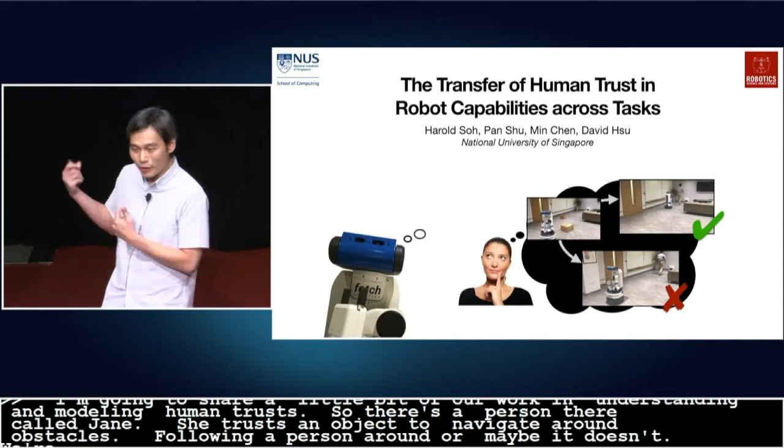We're interested in this question because trust affects how we interact with robots. It would be nice if robots can also infer how we trust so that they can guide our interactions appropriately. We would like to avoid situations of under and over trust, which can have dangerous outcomes. For example, in 1923, the US Navy lost 7 ships because the captain undertrusted her automated navigation system. Fast forward to 2018, and we have people overtrusting their self-driving cars, right?

So to understand this a little bit better in a world where robots can perform multiple things, we conducted human subject experiments using 2 separate task domains. Over here, you see the household task with a fetch robot performing pick and place tasks as well as indoor navigation. Over here, you see the autonomous driving scenario. I don't have my own self-driving car, so we built one in VR. Here it's doing various road driving and parking maneuvers.

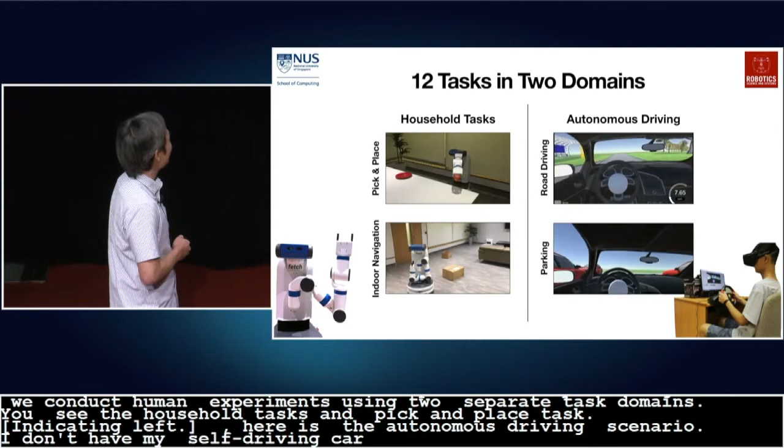So we brought people into the lab, and they would group these 12 tasks by similarity as well as perceived difficulty. After that, we would ask them, do you trust the robot to do these 3 different tasks here? And then we would show them the robot performing two of the other tasks. In these 2 others, the robot would succeed both times or fail both times. And then we would ask them again, how do you trust the robot now?

So what did we learn? Well, let me summarize for you. First, if you trust the robot to do something like pick up an apple, you'll probably trust it to do something similar like pick up a can of beer, rather than something very different.

The second thing is that when you see the robot do something, that affects your trust in not only that specific task, but also related tasks as well. Finally, trust transfer is a little bit asymmetric, and this makes sense once you think about it. If you believe the robot can do something very complex, very difficult, then it's more likely you trust it to do something simpler rather than the other way around.

So what does it mean in the context of modeling trust? Well, there seems to be some sort of underlying structure to tasks, which we call similarity, and that seems to affect how trust evolves. So how can we formalize this concept in a computational model? We're going to leverage vector task spaces, and we assume that the tasks all live in this space, and we can get to this space by projecting into it.

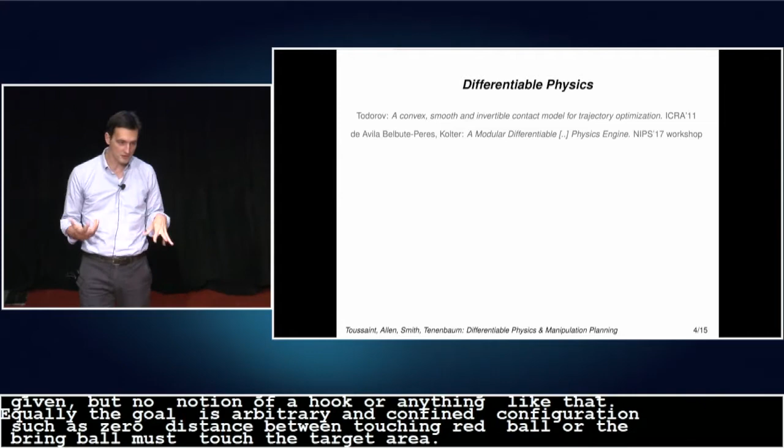Now, how could you approach such kinds of problems? Differentiable physics is a really interesting idea. It basically means that you could take any objective function over the future and compute the partial derivatives with respect to any input or parameter of a differentiable physical simulator. That's a very powerful idea, but in terms of manipulation, the question is, well, the gradient is very often zero if the contacts are not already there.

We believe that gradients alone are not the answer to solve these kinds of problems. We need a better and deeper understanding of what actually the structure of these problems is. If you would then smooth the contacts, well, you would end up with a combinatorics of local optima in these optimization problems. And we think it's exactly that combinatorics of local optima that we need to understand and formalize. So our formalization starts with formalizing a general path optimization problem.

Here, the path refers to all objects in the scene and the robot jointly. We have a standard control cost. We have the goal constraints, as I mentioned. And then there is the physics constraints, which simply says the path must be physically feasible. Well, that implies all the complexity and combinatorics that I just mentioned.

Now, on top of that, we introduce a logic. And the logic is kind of orchestrating the modes per object. The logic is saying, you're flying here, and you ball, you're rolling here, and then you two shall collide, and there shall be an impulse exchange equation for you two guys. So the logic kind of triggers which kind of differentiable constraints we have in the path optimization problem.

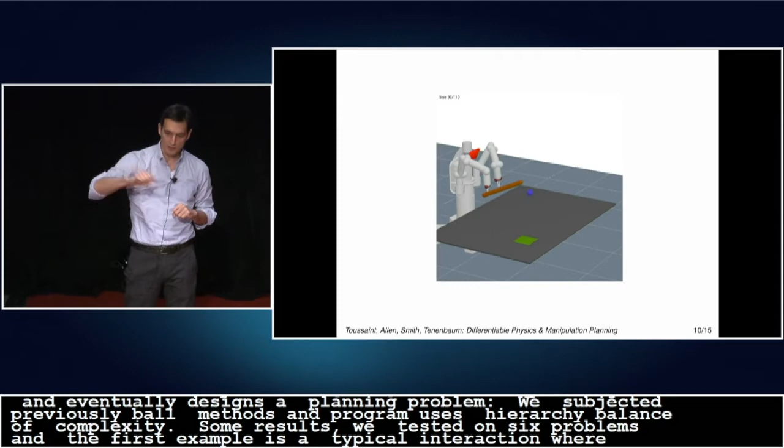Second example is in analogy to the bird retrieving the nut with a double hook. So it's taking one hook to get the second hook, taking the second hook to retrieve the ball, and then got the ball in the hand.

When you do the experiments, what is really exciting is that the algorithm actually not only produces a single solution, but a whole variety of solutions defined by that logical tree, by the possible sequences of modes.

I haven't conceived of this solution before, but just by exploring the full variety of possible mode sequences, the algorithm found this. The running time to compute all of these varieties is between 20 and 200 seconds. More details at the poster.

We also did experiments with humans and analyzed whether the mode sequences kind of compare to what our algorithm proposes. They kind of do, but frankly, we also found a lot of limitations of our method that do not match up to what humans actually do.

Let me conclude saying that this work very much tries to integrate ideas from many, many different areas. So if you're a researcher into task and motion planning, I would hope that you're interested in our method because we're using optimization to get physics into TAMP methods. If you're a person into hybrid control, well, essentially what we're trying to do is bridge between control and AI planning, and we do so by introducing a special kind of logic to define mode sequences.

If you're into contact invariant optimization, differentiable physics, you could think of our work as introducing a logic of local optima. And I think it's very important to address this because, well, otherwise gradient methods get stuck. And if you're into dexterous robot manipulation, well, essentially, I was trying to understand your ideas and concepts of stable pushes and stable grasps and translate them to AI plannable representations. Thank you.

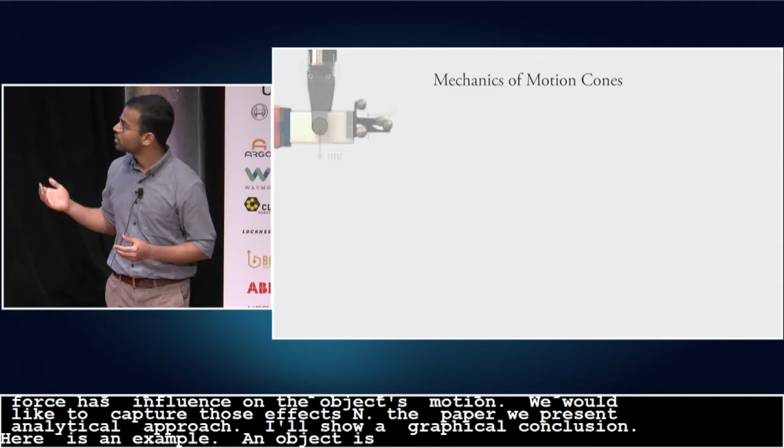In our paper, we present an analytical approach to compute motion cones. Here, I'll present a graphical intuition. Let's consider a representative example: an object in a parallel jaw grasp is pushed by a line pusher. The configuration space is three-dimensional, since the object can translate in the xz plane and rotate about the y-axis.

We model the force-motion relationship at finger contacts using a limit surface, which is the integration of all frictional wrenches over the finger contact area. For an external wrench on the boundary of the limit surface, the object will start slipping at the finger contacts, and the direction of slipping will be given by the normal to the limit surface.

When we consider the combination of all possible wrenches from the pusher and the gravitational force and intersect it with the limit surface, we get the set of finger wrenches for possible object motions. When we draw the normal to that intersection, we get the set of object motions that the pusher can impose using the frictional contact. This set is a cone defined by low curvature surfaces, and this is the motion cone. Any object motion inside the motion cone respects the dynamics of pushing.

Motion cones in general abstract the dynamics of contact-based manipulation and can be used for simulation, planning, and control. In this paper, we explore their application for planning in-hand manipulations in a sampling-based planning framework. Specifically, we use the knowledge of these feasibility bounds, or reachability bounds, from the motion cones to grow an exploration tree. So instead of solving for the complex dynamics of pushing, we project the sample configurations on the motion cones and grow the tree via motion cones.

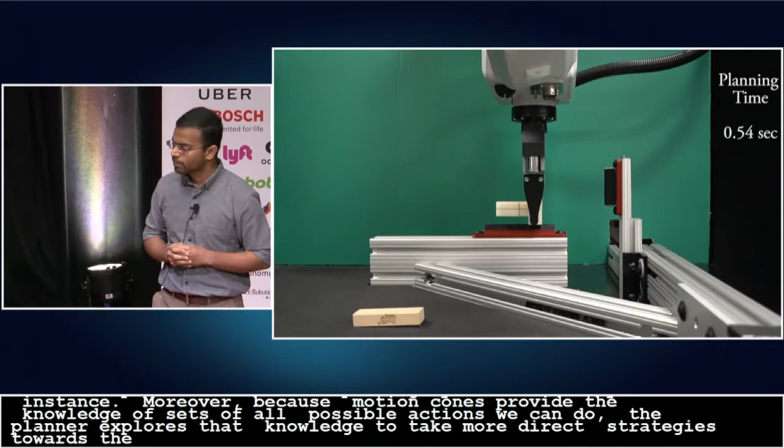We believe that using motion cones as reachability regions directly in the configuration space is a very powerful idea for contact-based manipulations. This reachability knowledge opens a window to see the connectivity in the configuration space and use it for fast and efficient planning and control.

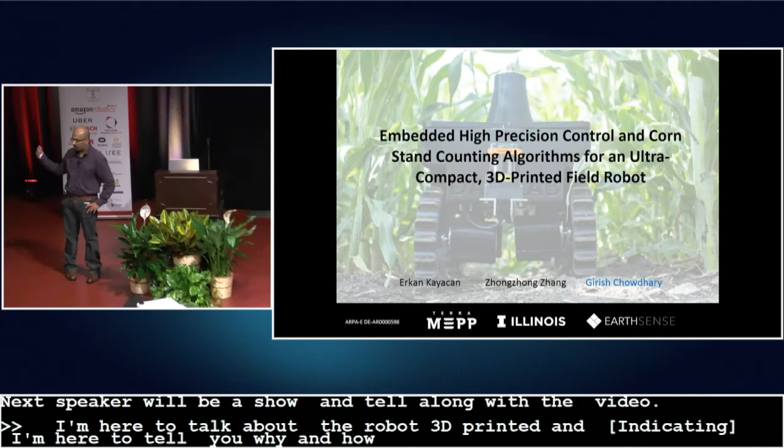Hi everyone, I'm Girish, and I'm here to talk about TerraSentia. That's our robot that we've 3D printed, and I'm here to tell you why we did it, how we did it, and what it means for agriculture. This work is joint with Erkan and Zhong, who are here helping me with the robot.

Did you know that corn, as we know it, did not exist in nature? It was bred by our ancestors over a process of selective breeding for the past 9,000 years. In fact, most of the produce we eat today is being continuously improved through selective breeding.

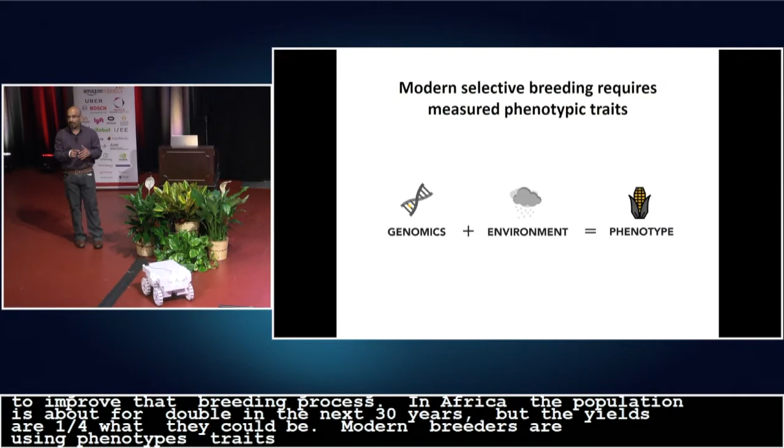Right now, there is a need to improve the breeding process, because in Africa, the population is about to double in the next 30 years, but the yields are only 1/4 of what they could be. Modern breeders are using phenotypes, which are traits, and they're trying to correlate these traits back to genotypes and then encourage those specific genes to come up with the next generation of crops.

In order to do this, they run massive trials over hundreds of acres with thousands of cultivars. They're trying to pinpoint the plants that are performing the best. But the lack of automation in making those measurements is a bottleneck to their progress. For example, consider this guy counting plants in a field. It's an annoying job, and it takes quite a while.

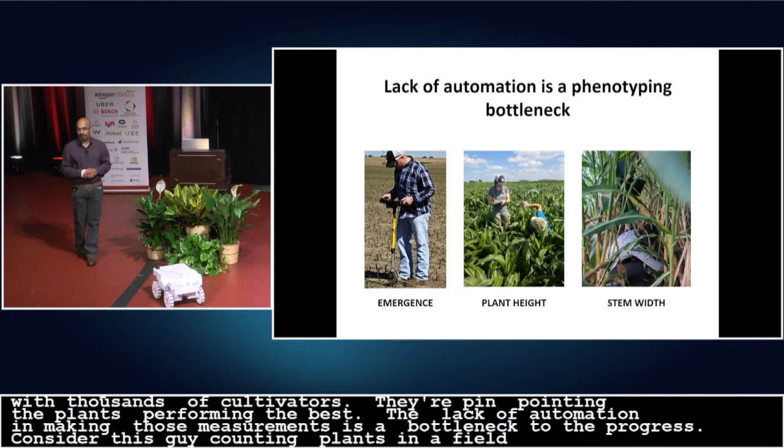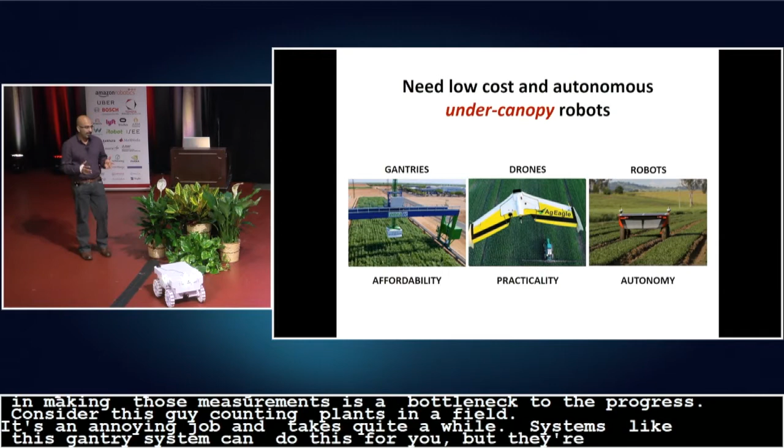Systems like this gantry system can do this for you, but they're extremely expensive. Drones can't see under the canopy, so they're not as practical for this. So breeders asked us, can you build us a robot that can go under the plant canopy and count plants for us and do other things.

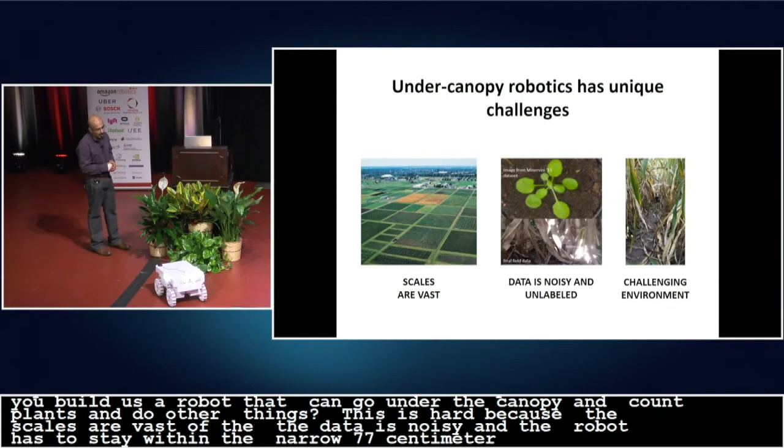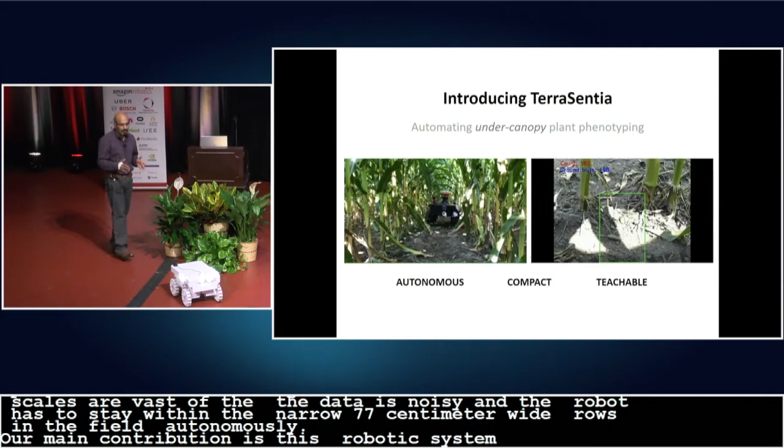But this is hard because the scales are vast. The data is very noisy, and the robot has to stay within the narrow 77-centimeter wide rows in the field autonomously. So our main contribution in this paper is this robotic system, TerraSentia, that can stay autonomously within the 77-centimeter rows of corn and sorghum. It's compact and lightweight, which makes it very easy to use, and we taught it to count corn using deep learning. Now I'll explain how we did some of those things.

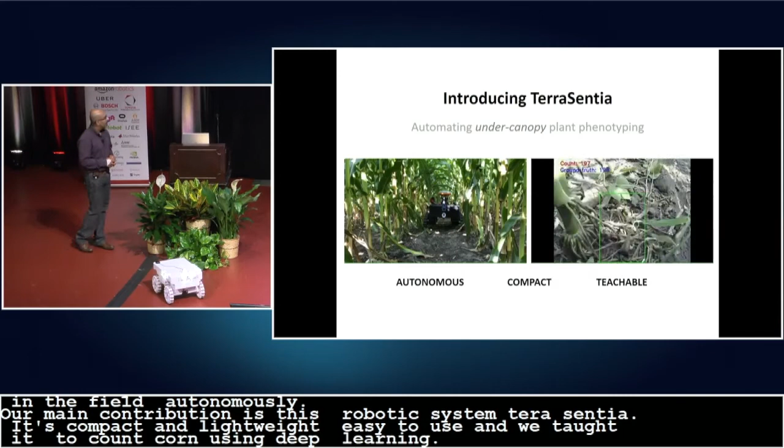The models we use for non-holonomic robots typically don't assume wheel slip. But on muddy days like this, the robot wheels slip quite a bit, and because of that slippage, you get a lot of loss of track, a lot of accuracy. So we introduced mu and kappa, forward and rotational traction coefficients, and created an adaptive controller that is capable of adapting to those traction coefficients using readings from gyro, GPS, and encoders.

This system can estimate the vehicle states as well as the traction coefficients and generate the control. It's highly generalizable to different types of sensors and different types of vehicles. Through field testing, we're able to show that this system can reliably report tracking errors less than 10 centimeters. That's really low for a GPS-based encoder, and it can meet rotational constraints and stay on track.

In order to count the plants, we use the sideward-facing camera and deep learning. But the challenge with deep learning is that you need a lot of data. Unfortunately, there aren't a lot of nicely labeled data sets with corn in them. So we used a transfer learning method that used the features from a convolutional neural network to train the robot to detect corn. Our method was able to detect corn with about 300 images.

The next challenge was to deal with changing plant spacing. It's not enough to assume that within a window there is a single plant. So we use the camera motion to detect how many plants are passing as the robot traverses through the field. This results in a very robust system that can count plants with different plant spacing at different growth stages, with different lighting conditions, and at different speeds.

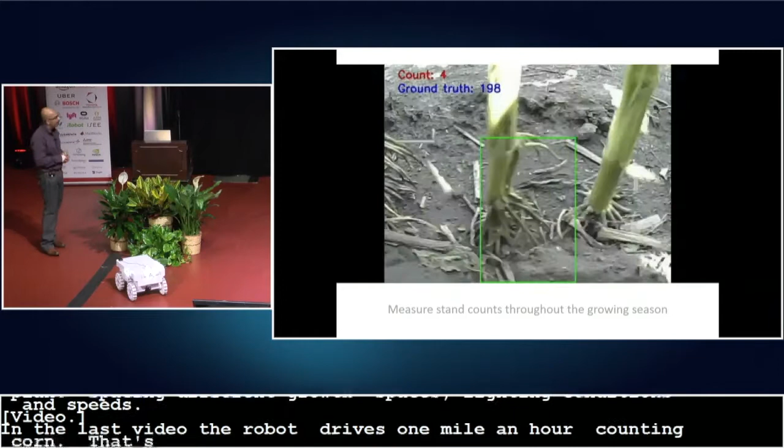In this last video here, the robot's driving about 1 mile an hour counting corn, this one here, and that's about 10 times faster than a human can do it. It's also fairly comparable with a human. In fact, breeders told us that they prefer the robotic measurements more, because the robot can actually autonomously measure the whole field, as opposed to humans, who practically can only measure a part of the field and then generalize to the rest. So when we showed this robot to breeders, they said, well, when can we get one?

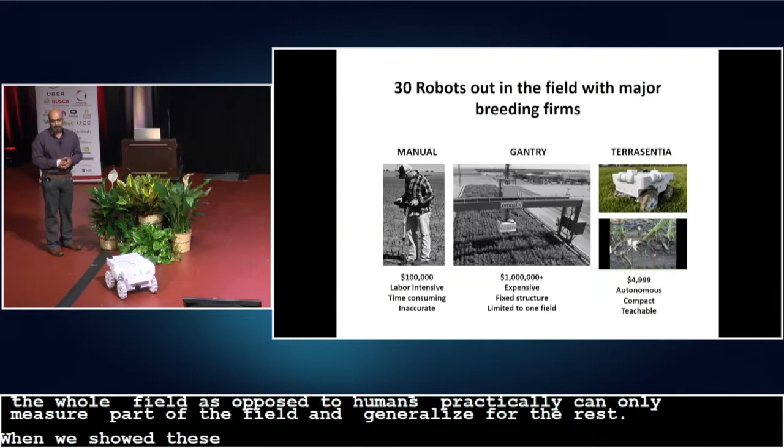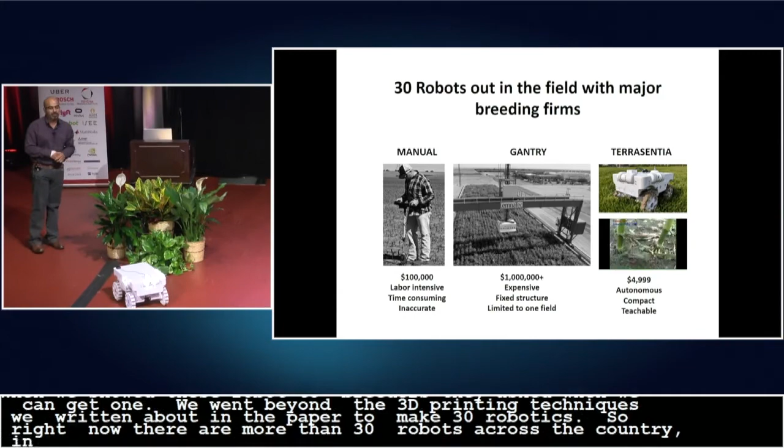So we went beyond just a demonstration and used the 3D printing techniques that we have written about in our paper to make 30 of these robots. Right now, across the country, there are more than 30 of these robots in fields helping measure plants and do other phenotypic tasks. So we think that these types of robots spell an exciting future for agriculture. Thanks.

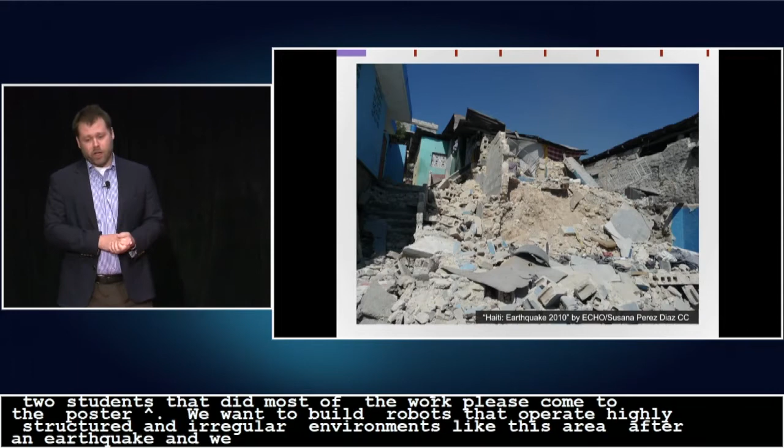We want to build robots that operate reliably in these highly unstructured and highly irregular environments, like this area after an earthquake. We think of mobility as one of the basic functions of a robot. So we designed a system that is able to modify the environment to provide navigability for itself and possibly other agents that share the operating space.

We think of navigability as a property of the environment, and then have the robot iteratively go through and change the environment reactively in order to provide a series of navigable points to an externally given target location. We proved correctness of this algorithm by coming up with a pretty abstracted version of the problem. Correctness here means that when the system finishes, you're guaranteed that there's a navigable sequence of points in the environment to let robots get to this externally given goal.

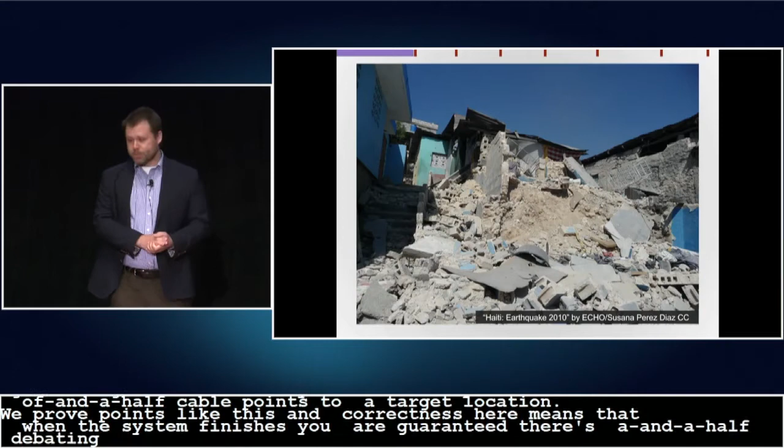There are three things that are really important in designing this abstracted version. One is the representation of the environment. The other is how to actually formulate navigability for robots in general, and then the material and the modification that you use for the system.

We used continuous height functions h to describe the state of the world, and that allows us to express really irregular features because we're not really stuck with any sort of discretization artifacts from the description of the system.

We think of navigability as having 3 parameters. For every robot, we imagine that there is a maximum slope kappa that the robot can go up. There is a discontinuity epsilon that most robots can just drive over without really caring. And then there's a characteristic length delta that describes how closely spaced these discontinuities can be.

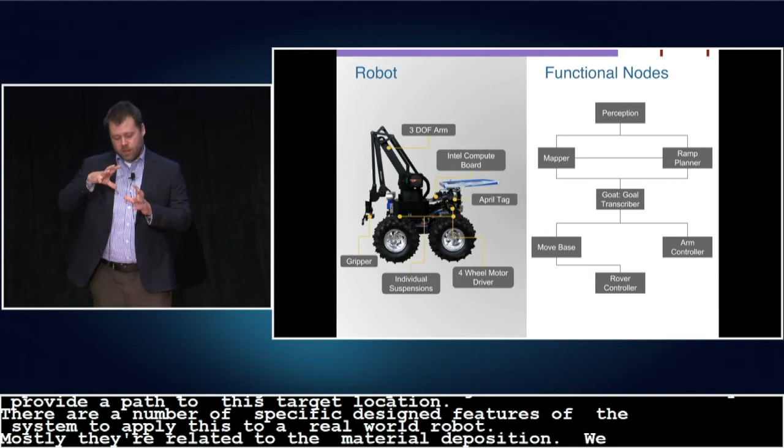We use these compliant bags because they both allow us to build on really irregular terrain, since these bags naturally conform to whatever you put them on, so you can build in really messy environments. They're also pretty easy to manipulate, so we can have a robot that just has this simple pinch gripper. The other part we found very important is to have suspension in the robot, because we want the robot to actually interact with the environment as it's being built, and we want it to be able to go over pretty large discontinuities.

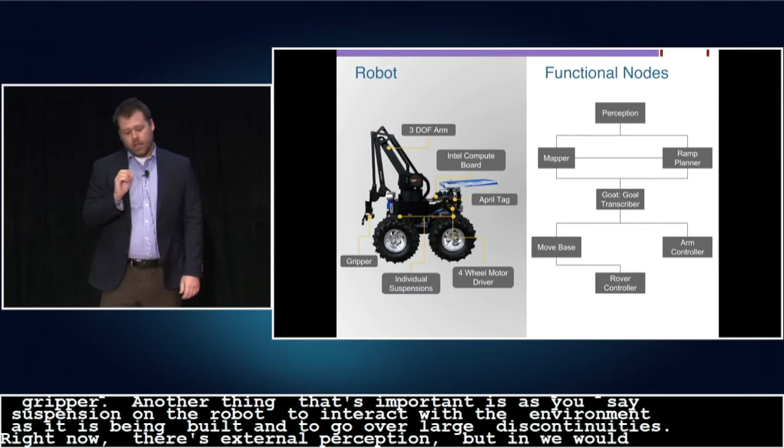Right now, there's external perception, but in future versions of the system, we would like to onboard that. In the video you're about to see, the target location is in the green area. The robot, once it determines that there is a point it needs to modify, goes out into the terrain, looks for these compliant pockets, and then places them on that irregular terrain.

So the system ends up being really robust. We placed many hundreds of bags over many hours, and the system can even recover from faults if you disturb the process.

The reason it's robust is that we're able to come up with this abstraction that allows us to prove correctness of this algorithm. We made all the pieces of this abstraction such that they're easy to map back onto a physical platform. If you have any questions, please come and speak to us at our poster. Thank you.

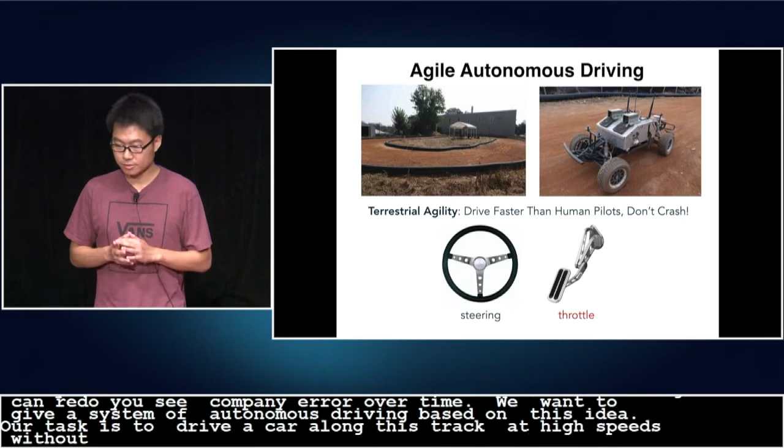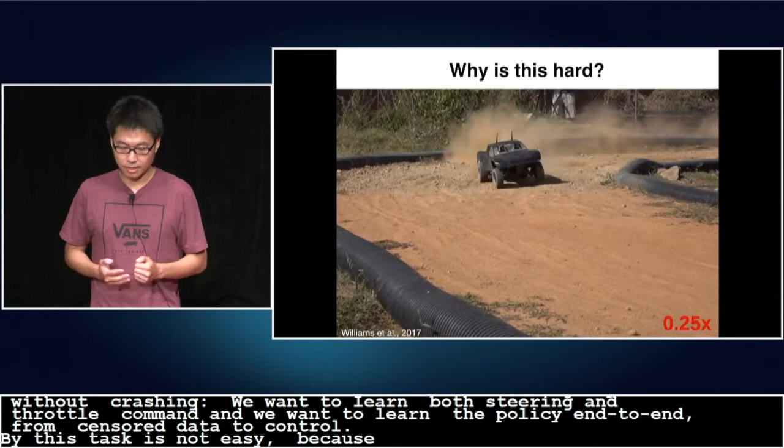So we want to build a system for autonomous driving based on this idea. Our task is to drive the car along this track at high speed without crashing. We want to learn both steering and throttle command, and we want to learn the policy end-to-end from sensor data to control. But this task is not easy because the dynamics of the vehicle can be very complex at high speed, and the decision needs to be made at high frequency.

In our system, the learner is a neural network that takes an image and the wheel speed as input. In order to train it, we designed an algorithmic expert that consists of several modules, including state estimation and model predictive control. The expert has access to more advanced sensors, such as GPS and IMU. During the training phase, we have the learner, we have the expert, and we also have a safety controller to prevent high-speed crashing. During testing time, we no longer need the expert, so the learner only has access to low-cost sensors. After three iterations of online learning, we were able to obtain a policy that could perform high-speed, stable driving.

In this video, the car was controlled by a neural network, and it only has access to a single camera and wheel speed sensors. In this video, we're showing a camera video recording during training and testing time. You can see that the learned policy is robust to minor changes in the environment.

We also compared the performance of online learning and batch learning, and we found that the performance of online learning is better than batch learning. In addition, we analyzed the generalizability of the trained neural network by embedding features in low-dimensional spaces, and we found that the policy trained using online learning is able to map training and testing data to a similar feature distribution. To summarize, we built an imitation learning system for high-speed autonomous driving, and we provide real-world demonstration of imitation learning theory. Thanks.